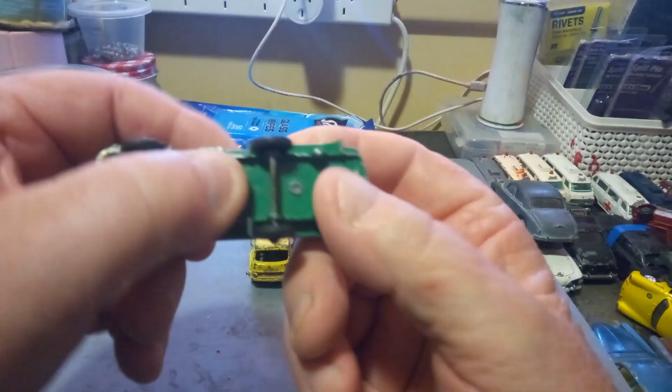Okay, it's the BP tanker from Matchbox. Petrol tanker, made in England by Lesney. This one's missing its rear wheels and axle. It tips, has the engine, no glass, no interior. That's the first one.

Here's our second one. Still got the tipper, still got the engine, no glass, no interior - they never came with them. This one has half a broken wheel, so we'll need to do something about that, besides stripping and repainting them.

Here is the tipper. It does have its tailgate, it does have all its wheels. The front part does not tip because it has the slot in there which holds in the wheel and base. Overall, besides the paint chip, it's not in too bad a condition.

Here is our second tipper. It does tip, it is missing its tailgate. The pin is loose on the tipper in that it sometimes comes off on an angle. The rear axle - the part that holds the axle in is broken, so we're going to have to do something about that. Otherwise, not too bad condition. The tail boards aren't folded in or anything like that.

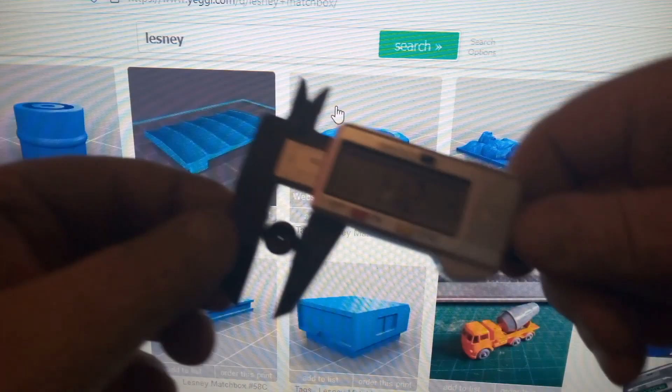And we're also looking for the 11mm tyre. And how do I know it's 11mm? By getting my vernier calipers, and I'll take that bright screen away from you so you'll be able to see it. That says 11.2, that's close enough to 11mm for me.

So I always like to open them up in a new tab, same thing with that one, a new tab. And that's taking us to Thingiverse. There's lots of files on Thingiverse or Cults 3D, all sorts of places where there are files to download.

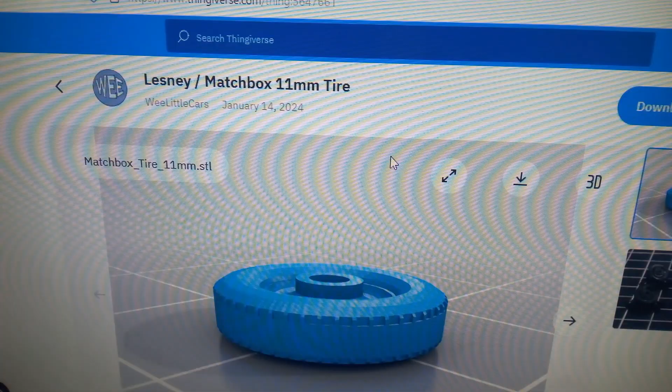I don't particularly like websites that ask you for cookies, because what happens is that you'll see ads all over the place, plus hackers go into it via cookies, and hackers can find you that way. Anyway, this is the Lesney Matchbox 11mm tyre.

That person has printed them, and by the looks of it, that person used what's called a PLA printer. I have what's called a resin printer.

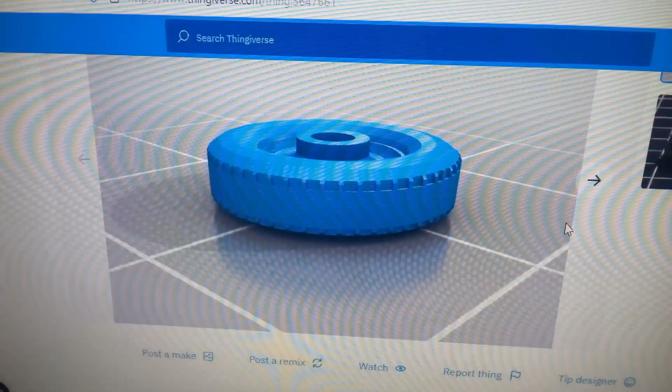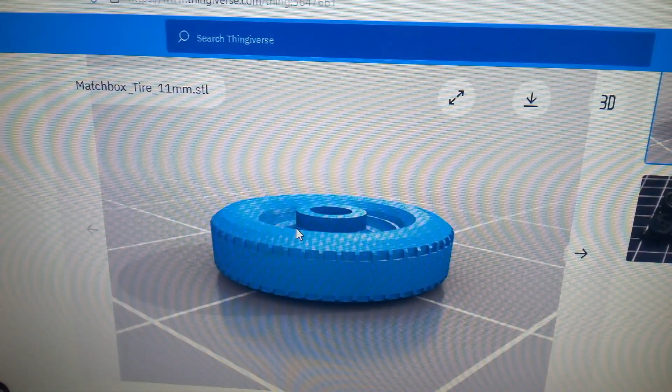This was designed by Lee, who used to be known as Time Rider, now has his channel as Wee Little Cars. He's been into diecast restorations for about 4 years, and he's done very well. So I followed him for a fair while.

Shout out to Lee, Time Rider, for providing these files. They're free to download, and we'll have a look at the tipper, because that's the truck that we're doing. That is the tipper.

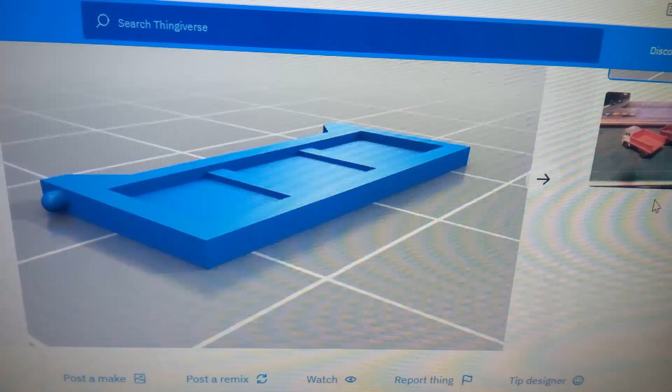This was done on the Elegoo Mars 2 Pro. They used rafts. This was a fellow by the name of Dinehart. Again, shout out to Dinehart for allowing us to download and use his file, his design.

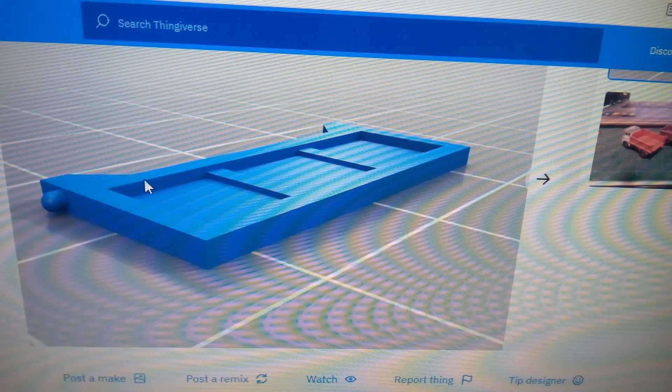Download onto a USB drive, and then we can take it over to, well, before we can take it over to the 3D printer, we need to put it through a slicing program. So let me set that up and we'll bring you back.

Before we can use our 3D printer, we have to save the file onto a USB drive and put the USB drive into the printer. Some printers can work over a wireless network, you can send them that way, and some you can send via the internet or the cloud, depending on where it is. My printer doesn't have that function, so we need to save it to a thumb drive.

So we now need a slicing program to help change the language of the file that the printer understands. When you purchase a 3D printer, it usually comes with its own slicing program, and mine was the Anycubic. But through suggestions from other people who've used 3D printers, they either use the Chitubox or the Lychee slicer.

They all do the same thing, just like if you have a Mini Minor to a Rolls Royce - both vehicles do the same thing. They have 4 wheels on the ground, a steering wheel, and a nut behind the wheel. But there are subtle differences. The same thing with the slicing program - there are subtle differences. The main one I've been using has been the Chitubox.

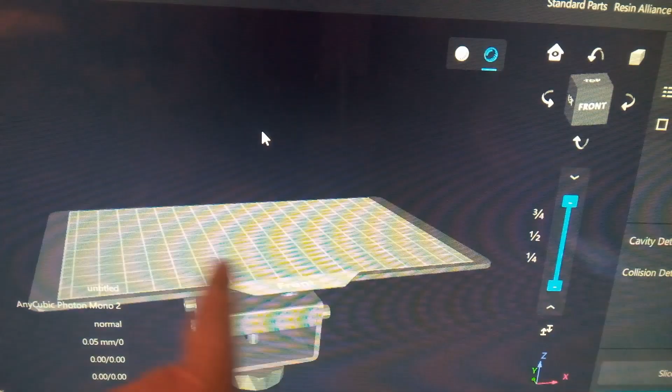And it gives us a build plate. Now, before we add any files, I'll explain a little bit about the build plate. They design the build plates in the software for you to understand.

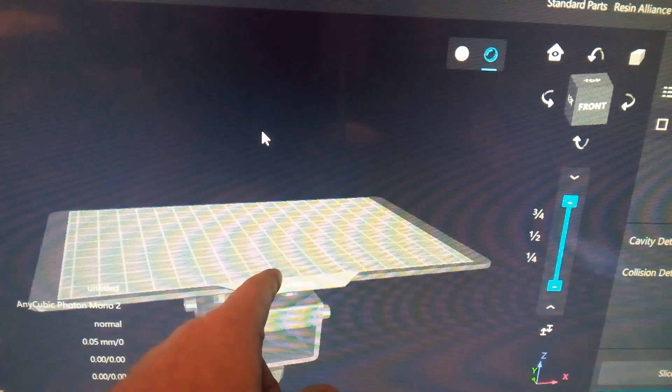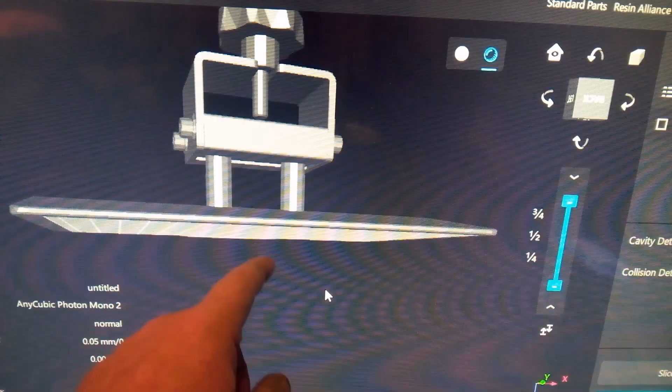If you're using a PLA or FDM printer, which is the filament type printer, your print is built this way - it goes from the plate and gets built up there. If you're doing resin printing, it's done the opposite way around. Your build plate and your print gets built this way. So it's a little bit hard to understand if you're new, but you shall see that later on as to my meaning of it.

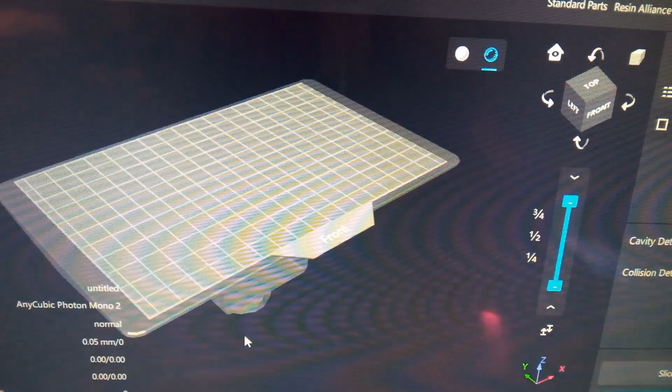So let's go back to what's called home. We need to import our files, so we go to open. We're looking for where you saved the file when you downloaded it from Thingiverse.

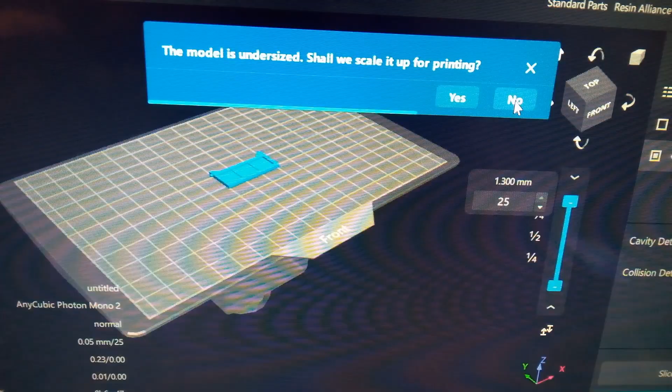This is the tailgate STL file. That's the tailgate. It says the model is undersized, shall we scale it for printing? In this case, we're going to say no. And that is our print. It's flat on the bed. Because it's showing us all blue, that's all good to go.

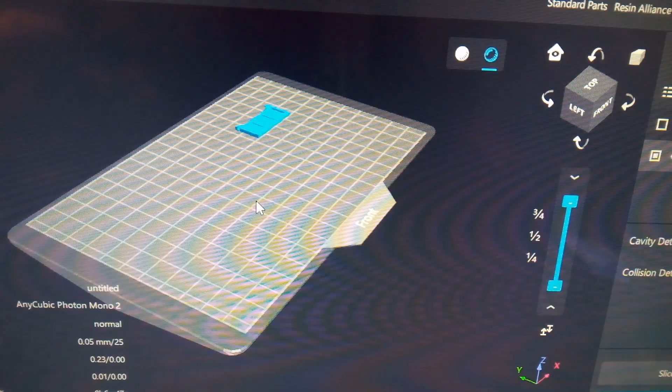I'm just going to move it over to the side because now we need to bring in our tyres. So we go again to open, and we go and find our tyres. In my case, where did I save them? In rims and tyres.

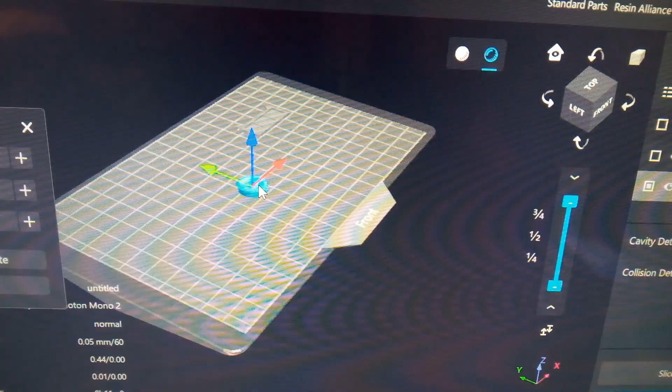Matchbox, and we were looking for the 11mm tyre, which is this one down the bottom here. No. And there's our tyre. Now, what we're going to do with the tyre is, because we need 4 tyres, and that's only one.

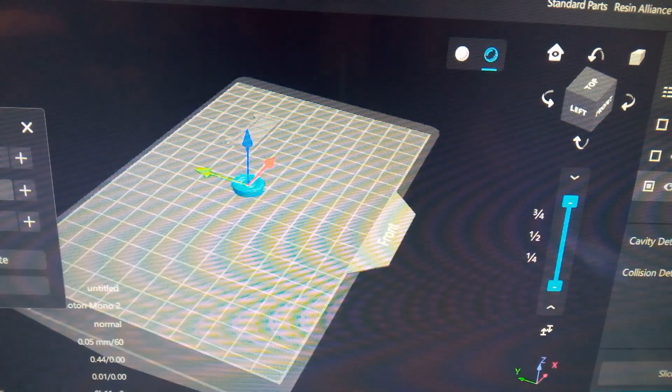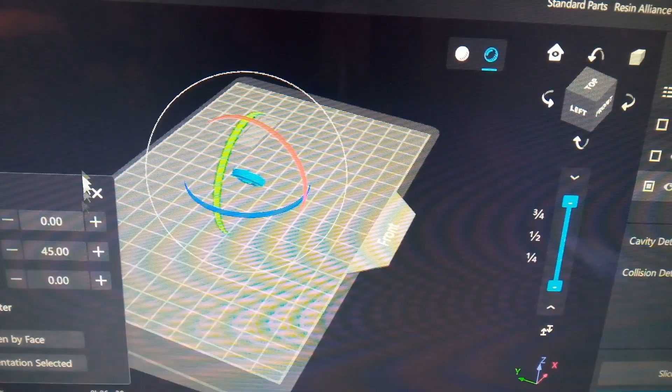The easiest way to get the tyres in is to make copies. But before we do that, we're going to put some supports on this tyre, and before we do supports, we're going to angle the tyre. I know, my mind is a bit crazy at the moment - if you've been with me for a while, you know I'm crazy. So we've angled the tyre to a 45-degree angle.

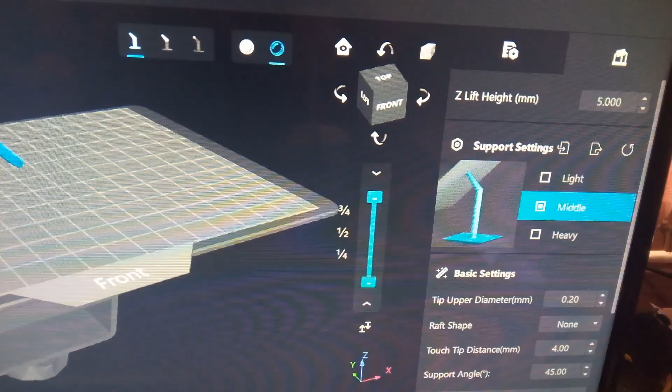We're going over to our supports. I use a middle strength support, as in the past I've tried light and it printed the supports, but it didn't print the tyre because the tyre was too heavy. I found that the middle was better. I'm going to say auto support, and this is what it has given us.

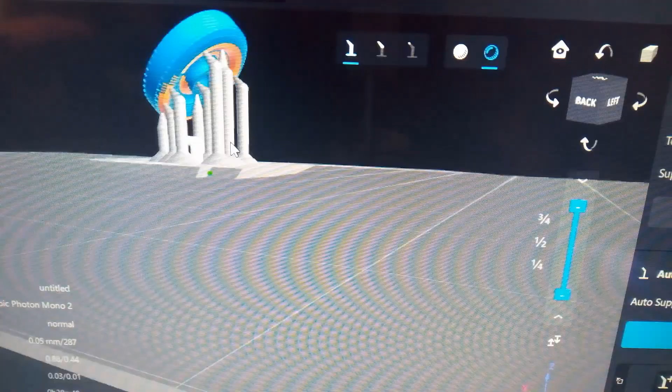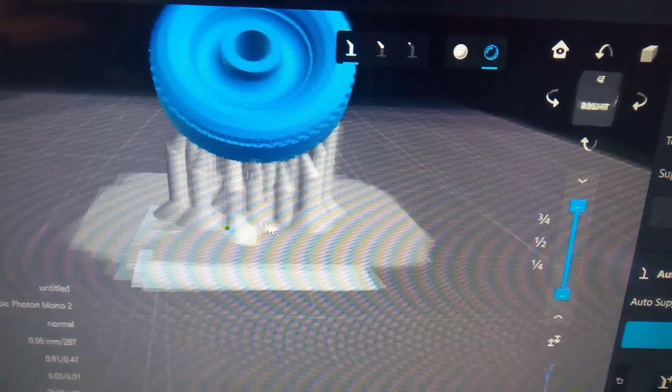It can deal with a couple of extra supports, so we're going to add them in. Once you've had a practice at this for a little while, you'll get to know where you want your supports.

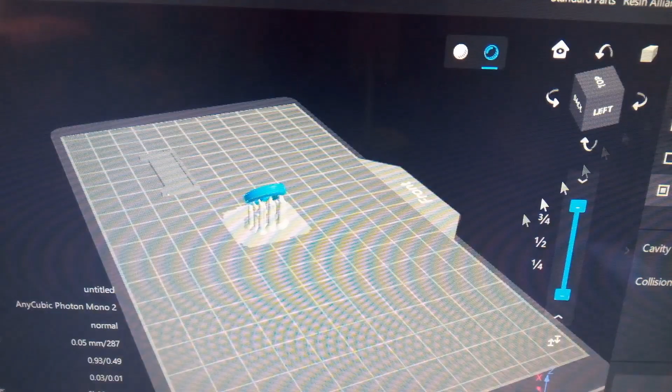That should be enough for that. We can zoom out, come back over to our main screen, send it back home. Get out of that, just move that over to here.

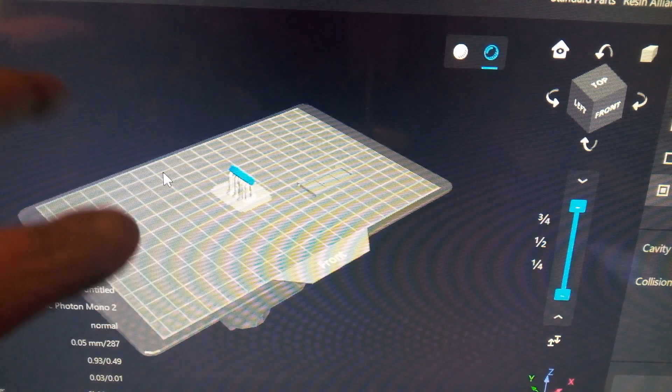So now we need another 3 tyres. Instead of having to drop a tyre in and redo the supports another 3 times, all we do is a copy. We tell it we want 3 tyres, click on apply, and there they are on our screen. They already have the supports.

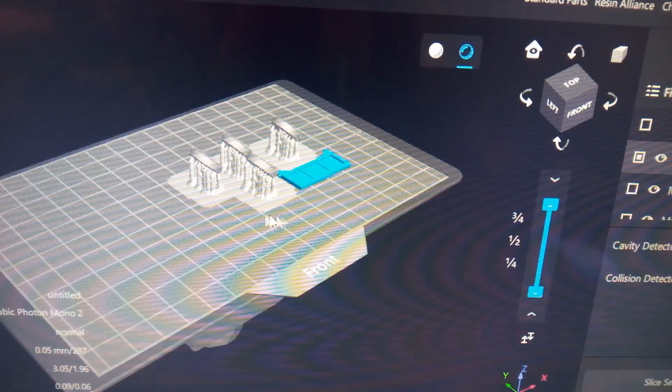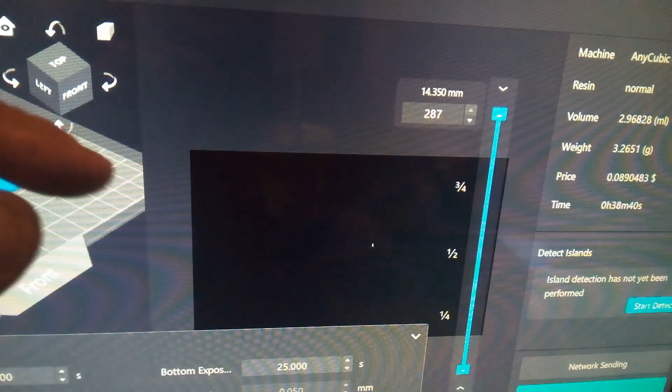And there's our tailgate. All right, so now we're going to select everything. We're going to tell it, down the bottom here, to slice it. And the slicing is layer upon layer upon layer as it builds up.

Now this is telling me that we're using the normal resin. It's going to use up 2.9 mils, or just under 3 mils of resin. Its weight is 3.2 grams, that's for all of it. And at a cost of 0.0890483 dollars. The time to print is approximately 38 or 39 minutes. That's what it's telling us.

We need to still do one more thing. We had to look for what are called islands. Islands are not so good because it's a waste of things. It has found 2 islands, so now we need to check them out as to where they are.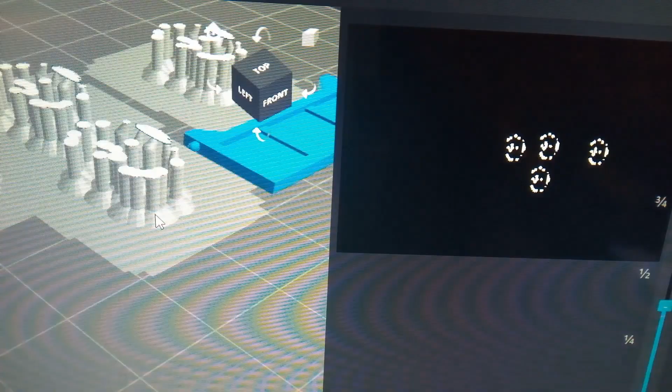So we go up to here, I'll move that screen up a little bit. And what that's telling us is the islands are in the 4 tires. So that's this over here. When I bring it in, it's all got to do with supports, so we can leave them in.

If they were red like this, then we would need to delete them. I'm going to be happy with that.

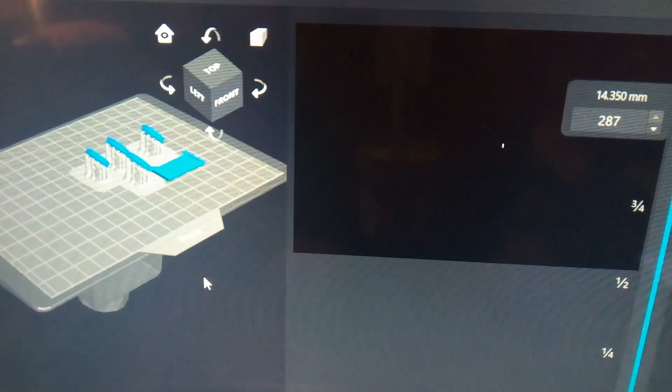We now save the file. Now it saves it into the language that the printer understands. We're putting it into our USB drive, which I've named 3D Prints.

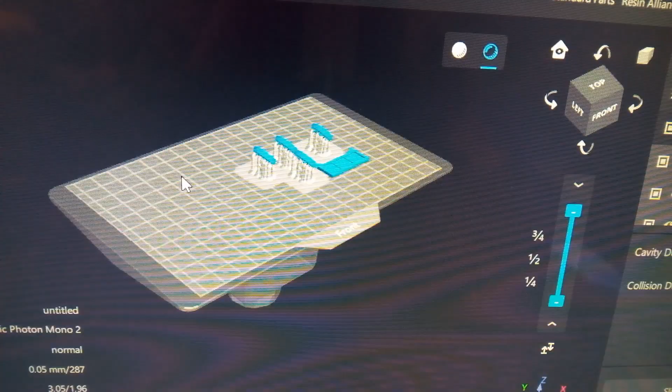We're not finished, I've just realised we're not finished. So I'll cancel that. The reason I say we're not finished is because Time Rider was a very nice fellow for us customizers, so to speak, and he's also designed an interior for these TK cabins. So that's what we're going to do as well, we're going to put in some interior. Excuse me for waffling on, didn't mean to keep you for that long.

I've got to find my stuff again. Get ready, there we go. That's the tailgate, and this is the Bedford truck interior.

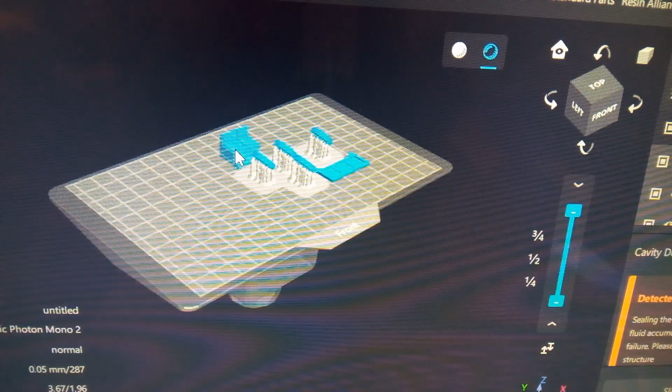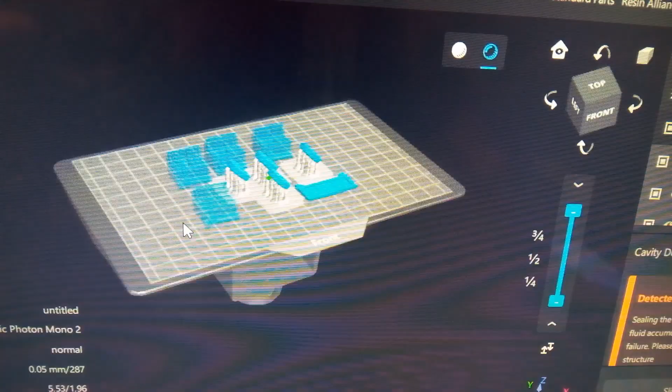There's 1, 2, 3. You can add things that way as well. All right, we can move them around if we want.

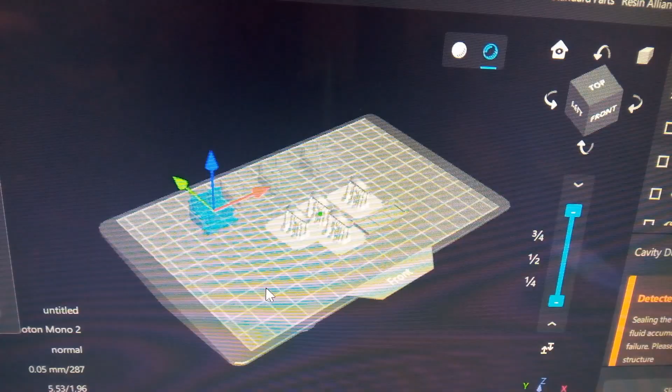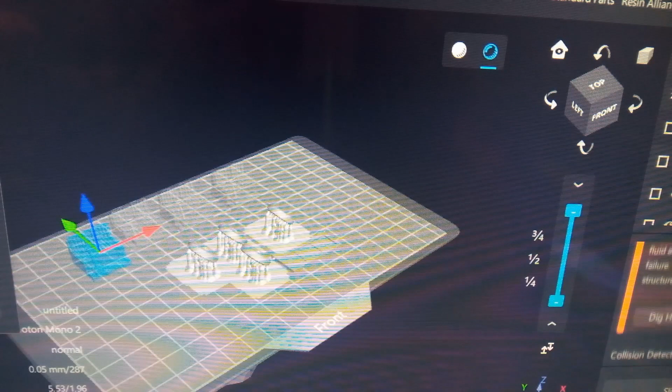All right, let's have a look underneath, see what's green and what isn't. Back home.

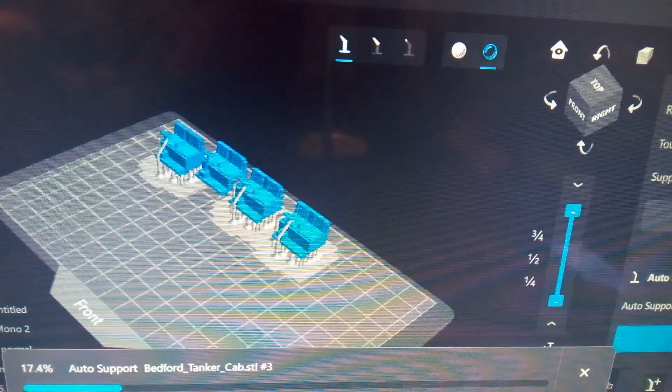All right, so what we're going to do with those ones that are highlighted there, we go over to supports, auto support. I don't think it's really going to be necessary, but I'm just doing it for the safety.

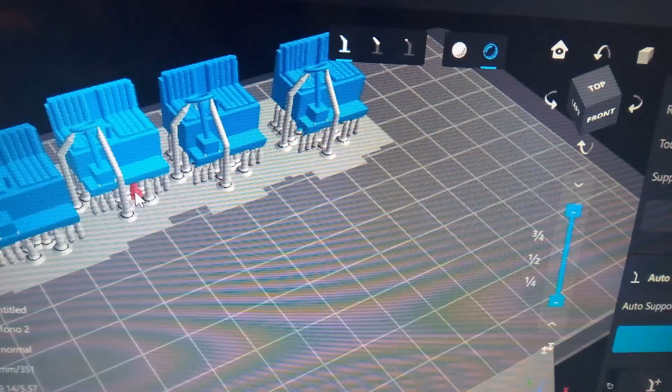We want to take the supports away. This one I want to take away, take away, take away. The reason why we have them on the side here is because you can't print in thin air.

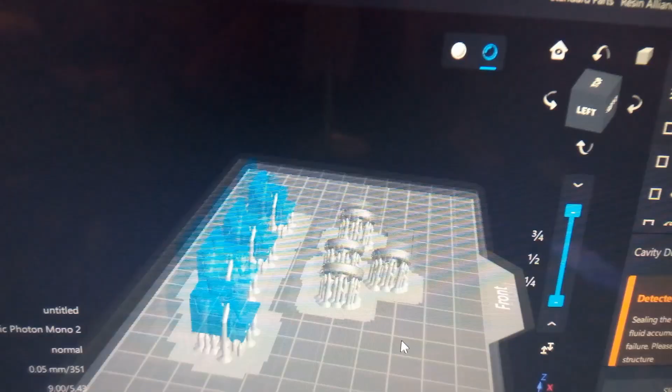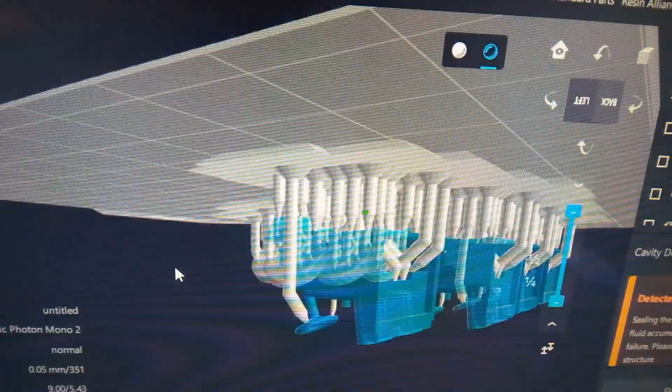So going back to our normal screen, remember that our print, we print this way, upside down. So this is how it looks like when it comes off the build plate, or when it comes out of the printer.

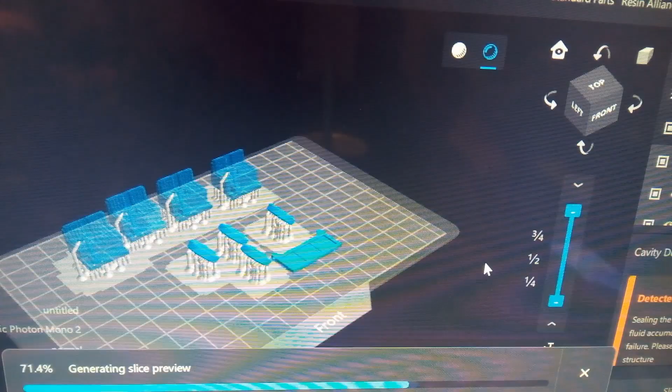All right, take that back home. Let's go Control A again, just reslice it, because they'll take everything into account. We'll just do another detection, and it should be just the tyres again like last time.

Yes, the same as last time. We can go save, and I'll take you over to the left hand part of the screen. Alright, this is how it's built.

This is what's called a base layer, which holds everything onto the build plate, and then it goes up in layers. So each one is a layer, and that's how your printer works.

And in the resin printer case, it is upside down. It is built like that. So you can preview how your print is going to go before you even start printing.

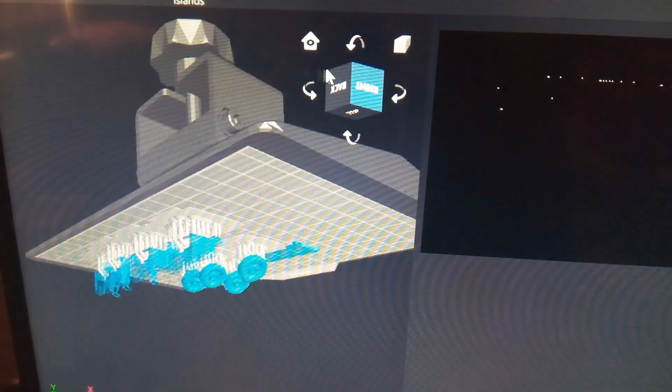If you're not happy with something, you then redo it. All right, I'm waffling on. Let's put this the right way.

We're going to save the file, like I said, back into our 3D print. We're going to make it, I'm just going to call it Bedford TK truck. Click on save. It now saves it onto the USB drive.

Once it's done that, we can then go over to the 3D printer. Yes, it's done. Excellent. So that's the end of the computer part of it. So let's get over to the 3D printer.

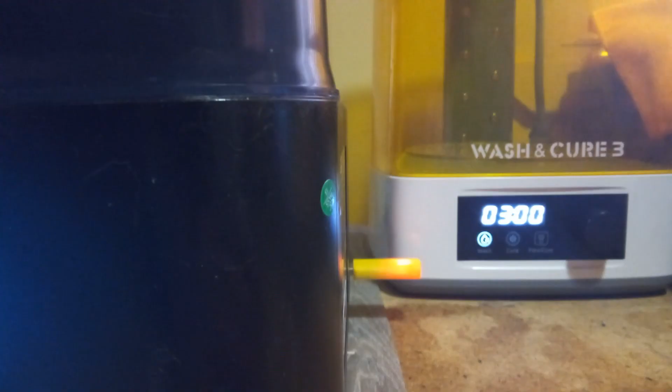Okay, the hardest part we've already done. That was getting the file downloaded. We sliced it. We put it on the USB drive. The USB drive is now in our resin printer.

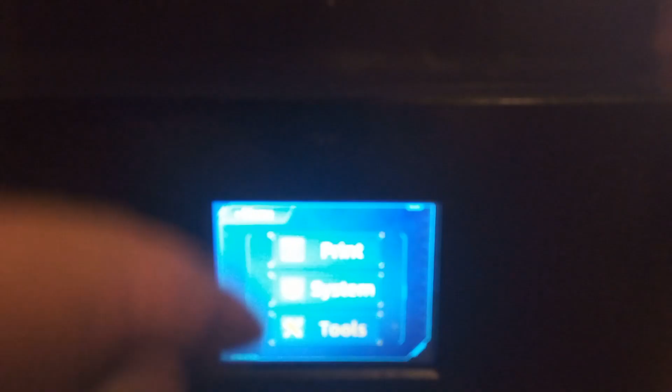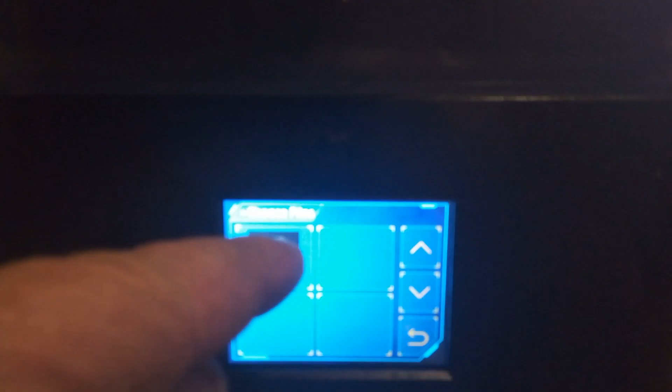From here, we go to print. You select the file that you're after. There's only one print on that file, so we can print that one. As you can see, we have our tailgate, 4 tyres, and our interiors.

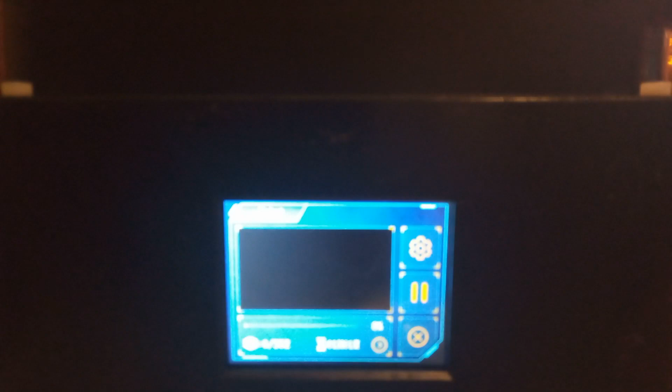We press the go button, and I'll just take the top off for the moment. You'll see the build plate go down, and that's going to go swimming into our resin. And that's going to bob up and down until our print is completed.

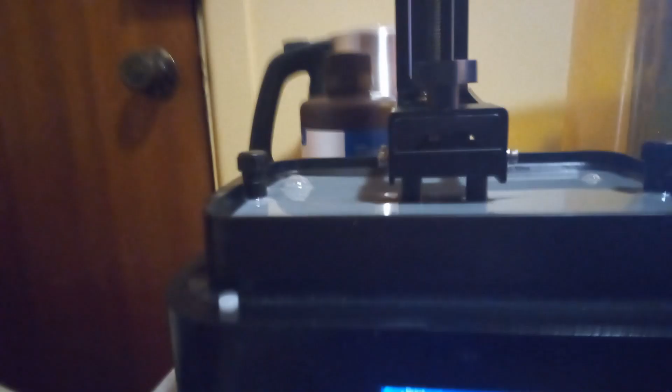There we go, we go into our resin. Our screen here will light up the layer that it's going to do while I put the lid back on. And if you look at the bottom of the screen, it'll tell you how many layers and the length of time that we're doing.

So that's now you walk away. This is only a fairly short print. There are prints that can take up to 3 days. It depends on what you're printing. This is only a short print.

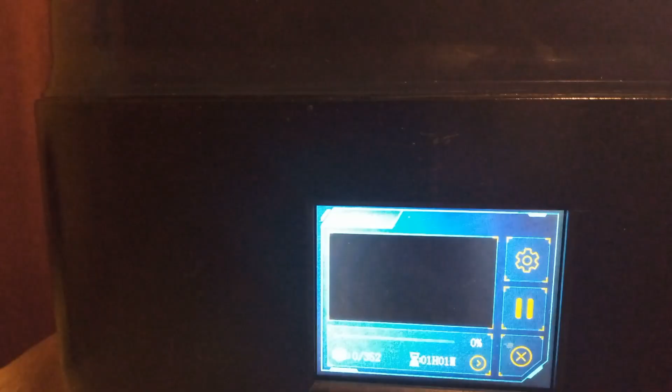So that's just printed its first layer. There's our second layer. The first 5 or 6 layers are usually about 25 seconds each. And we'll bring you back when the print is completed.

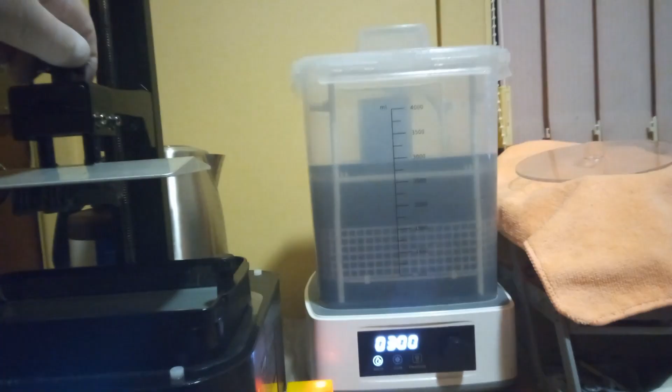Okay, our build has finished. So we just unscrew the top. We carefully bring our build plate down. We're going to let some of the excess resin drip off before we put it into that bucket over there that's got IPA in it, isopropyl alcohol, for a wash.

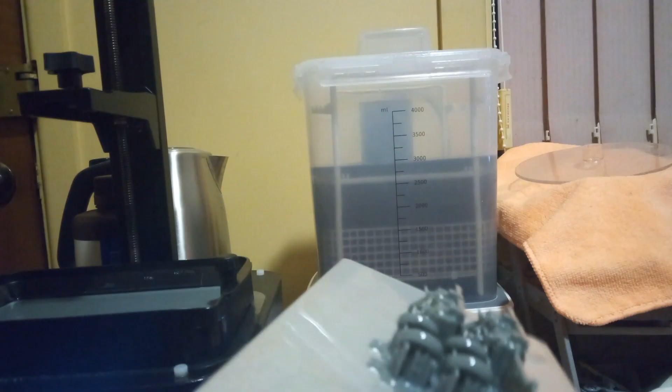Just shaking a little bit more off. So there's our build, our tailgate, our tyres and our interiors.

So we're going to open up this container. Get that to sit in there. Now this is a wash. It's like a wash machine.

Now what some people do is a pre-wash. I haven't set that up as yet, it's to stop it getting so dark or cloudy. They do a pre-wash, just a small tub, IPA, or if you have the water washable resin, with a little bit of soap and water.

Now this works like a wash machine. It will spin the IPA one way, then turn it around the other way. We'll set it for 3 minutes. We'll do that. While it's doing that, we'll put the cover back onto this.

So from here we can either put the resin back into one of our bottles, the bottle that it came in, or we can leave it in the vat covered. But you need to stir it every couple of days to keep it fresh, and the FEP film as well.

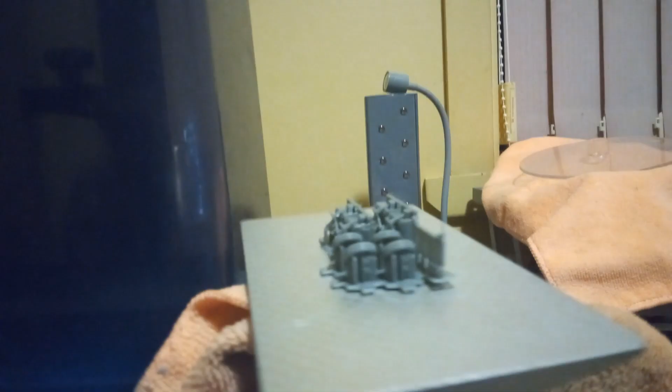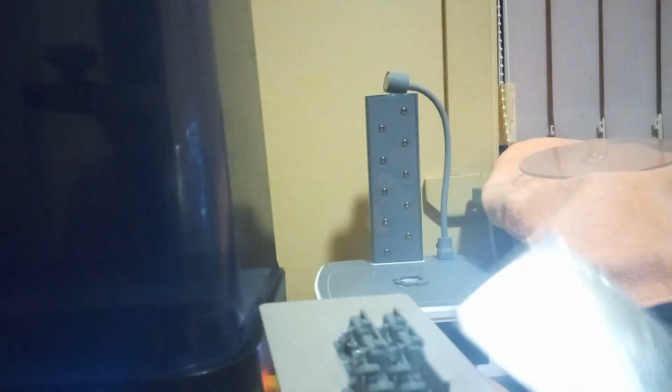All right, we have our build plate and our project out of our IPA bath. We now need to get it off the build plate, and we're using a metal scraper. And I always like to use the bevel side to get underneath the project. Sometimes it comes off easy, sometimes it doesn't.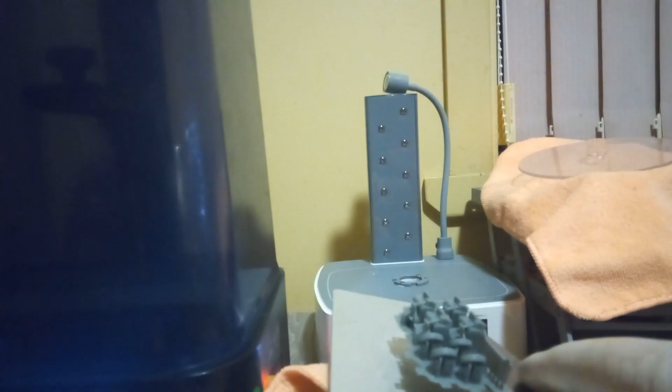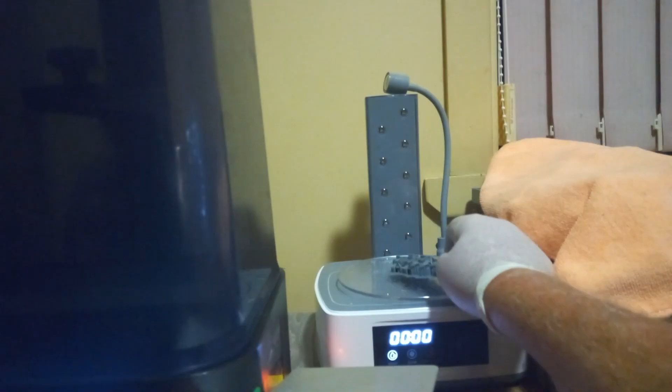I'll just set it back on there for the moment, because we need to set that up by putting the turntable on. I'll turn it up the right way. See, not prepared, Michael, not prepared. All right. Bottom is dry, sort of, from the IPA. We sit that in there. We clean up our build plate.

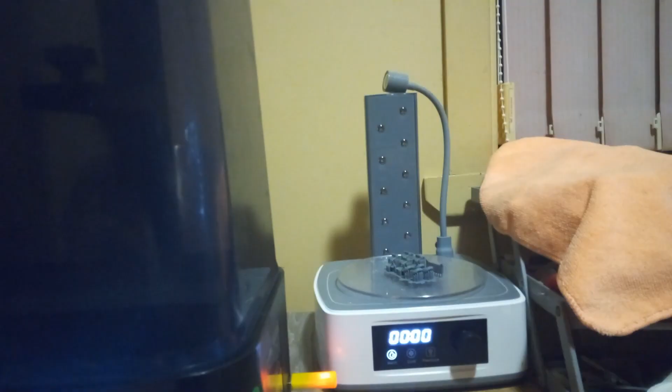We set it back into position, have it ready for its next job. Now that we have that in there, we need to put the cover on because it won't work without it.

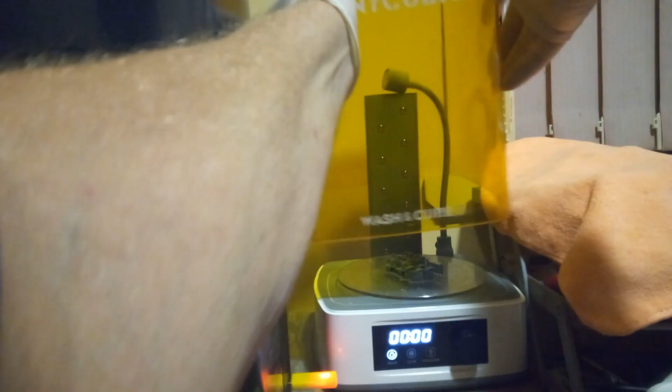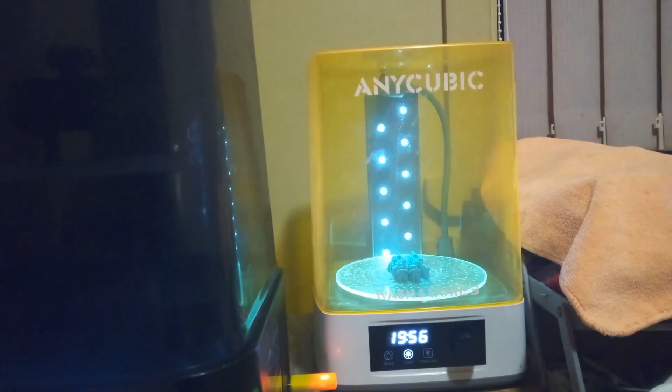We change this from wash over to cure. I like to set this one for 20 minutes. Some people do it less, but I like to put 20 minutes and press the go button. It's saying something's not right. There we go, the cover wasn't on properly. Lights are up, so we'll bring you back in roughly about 20 minutes.

Just got to do a little bit of cleanup because I'm rushing this a little bit, as per usual.

There's our tailgate for our tipper truck. We'll have a quick look to see if it fits. If I can get my fingers to work. Come on, fumble fingers. There we go. Exactly like our normal truck. So again, thank you to Reinhardt for your contribution.